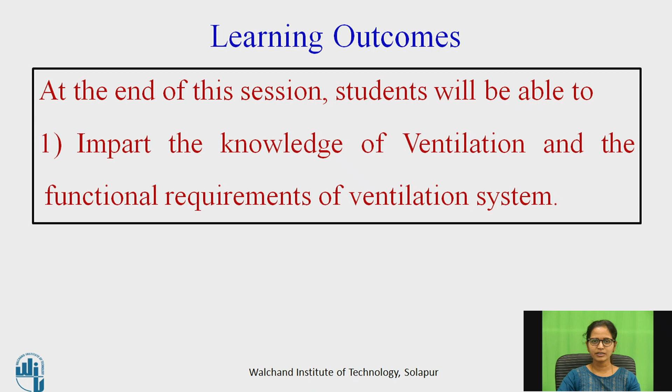So ventilation can be defined as a process of removing or supplying the air by natural or mechanical means to and from an air source or any space. In other words, ventilation is defined as supplying the fresh air from outside the building and removing the contaminated air inside the building which is affected due to bacteria, odors, or moisture. So it has to be removed by the ventilation.

Sufficient ventilation is essential to maintain the temperature limits inside and outside the building, as it may cause perspiration and humidity. On the other hand, a poorly ventilated room may cause discomfort to the occupants who are actually using that building. Poor ventilation may be due to an increase in the temperature limits, which depends upon the outer conditions where the building is existing.

An unventilated room causes discomfort and uneasy conditions to the people who are occupying it. The unventilated room leads to headache, inattentiveness, and even laziness. So that point has to be taken into consideration. That may be due to the increase in the dust quantity, the increase in carbon dioxide and sulfur dioxide, and it may lead to sweating and humidity also. So that point has to be considered.

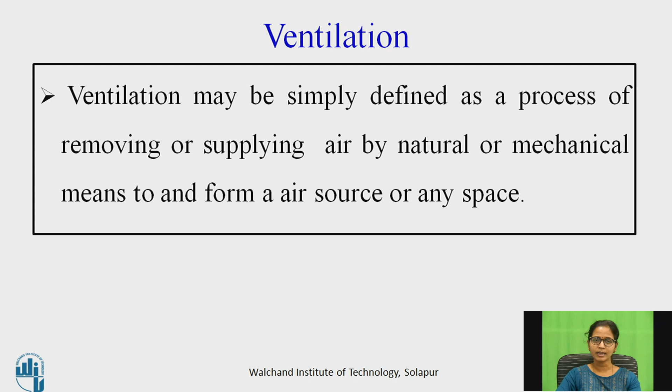Even the size of the room matters in ventilation. A number of windows and doors has to be provided to avoid the contaminated air entering inside, and fresh air has to be supplied to the room. It also depends upon the age and the number of the occupants using the building. These are the factors to be considered while designing the ventilation system, and even the outdoor conditions where the building is situated.

Importance of ventilation. It prevents an undue concentration of body odors, fumes, dust, and other industrial products. It prevents an undue concentration of bacteria-carrying particles, it removes the products of combustion, and in some cases it removes the body heat and the heat liberated by the operation of electrical and mechanical equipment. The heat liberated by machines can be easily removed by the ventilation system.

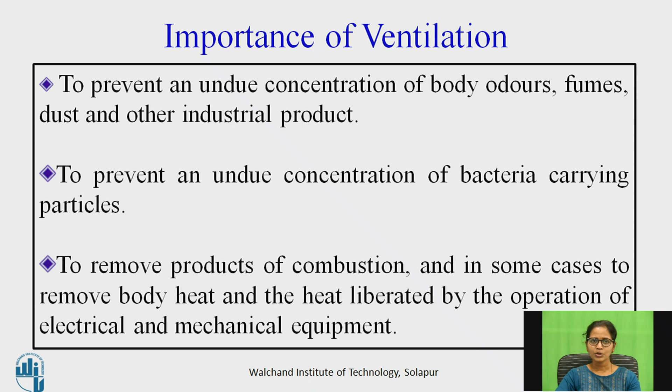Ventilation creates healthy and comfortable living conditions for the occupants. The air movements or air changes continuously take place in the room due to ventilation, and the temperature limits can also be maintained inside the building. So this is the importance of ventilation.

The functional requirements of the ventilation system are the following: first, the rate of supply of fresh air; second, the air movements or air changes; third, the temperature of the air; then humidity; and finally, the purity of the air.

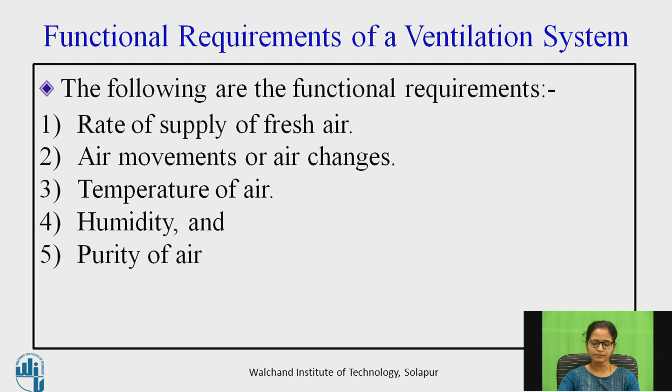So, rate of the supply of the fresh air. Actually, the quantity of the fresh air to be supplied to a room depends upon the use of the building to which it is subjected. So the temperature limits between the inside and the outside of the building have to be maintained. The quantity of the air which is to be supplied to a room during summer has to be cool, and it should be warm in winter. So that care has to be taken.

And when the velocity of the incoming air is high, the temperature should not be lower than the room temperature. So that factor has to be considered. And the quantity of the fresh air, other than the air needed for breathing, which is essential to survive, has to be maintained and supplied to a room. The rate of supply of the fresh air depends upon the number of occupants, the age of the occupants, and the purpose for which the building is designed.

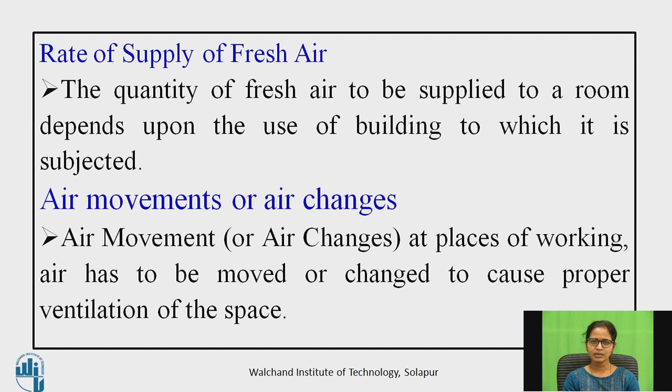And next is the air movements or the air changes. At places of working there is a continuous movement of the air, which causes proper ventilation of the space. In industries, there is continuous movement: people go on walking, and equipment and electrical machines are continuously moved from one place to the other. Even there the ventilation system has to be provided. Industries are located on the outskirts of cities, and due to that air movements continuously take place there.

So the temperature of the air. It is desirable that the incoming air for ventilation should be cool in summer and warm in winter before it enters the room. This is the main factor which has to be considered. The difference between the inside and the outside of the building should not be more than 8 degrees Celsius. So the location of the building has to be taken into consideration, and even how the surrounding area is.

And it should not contain any odors, moisture, bacteria and so on. So that point has to be noticed. Whatever air is transferred to the room should be cool in summer and warm in winter. So next is the purity of the air. The purity of the air plays a significant role in the comfort of the people affected by the ventilation system. Due to the supply of fresh air to the room, the occupants of the building will not be affected by contaminated air.

And the quantity of the air supplied to a room depends upon the temperature limits. The minimum and the maximum rate of supply of fresh air to a room per hour are 1 and 60 respectively.

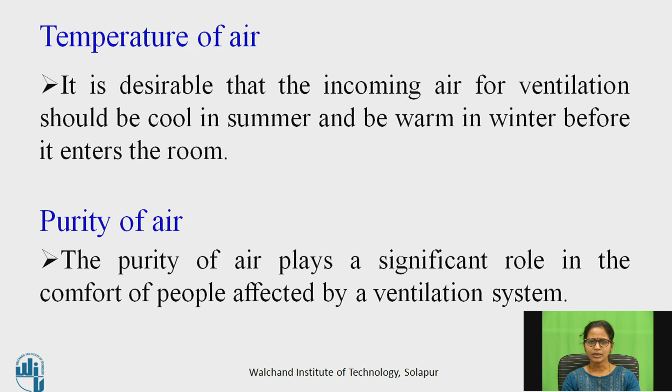And the purity of the air depends upon where the ventilation system is located. The ventilation system should not be located in a contaminated zone, such as very close to the kitchen, or where the outer conditions depend upon the locality. The ventilation system should be away from the reach of the kitchen and even the latrines, so that you can enjoy the purity of the air. So that point has to be taken into account.

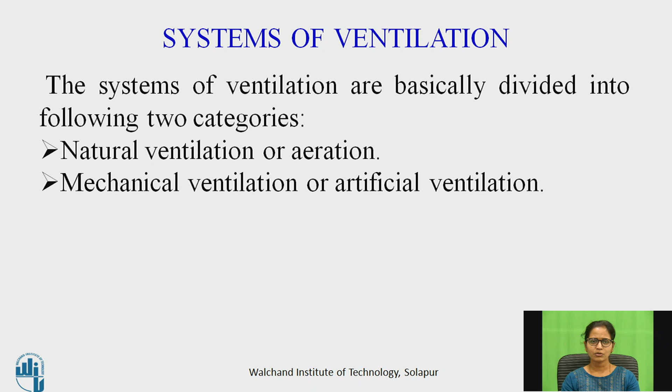So next, the systems of ventilation. Basically the systems of ventilation are divided into two categories: natural ventilation, which is also called aeration, and mechanical or artificial ventilation. In the types of ventilation, we have natural ventilation, exhaust ventilation, supply ventilation, and mechanical ventilation. Out of these, we are going to study natural ventilation and mechanical ventilation.

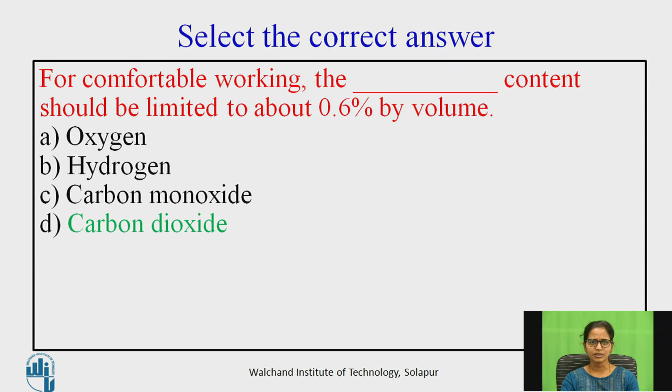So these are the MCQs. For comfortable working, the blank content should be limited to about 0.6% by volume. The options are: first, oxygen; second, hydrogen; third, carbon monoxide; and fourth, carbon dioxide. Let us see which is the right answer. Yes, carbon dioxide is the right answer. For comfortable living conditions, carbon dioxide content in the room should be limited to 0.6%.